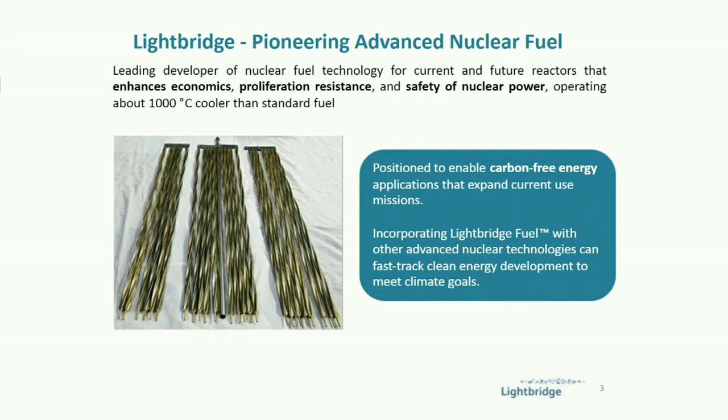The current fuel has these pellets of uranium stacked up inside a tube. Our fuel are metallic rods, one solid piece of metal, with several zones within the metal with different materials produced in a very advanced way. And this fuel runs 1,000 degrees Celsius, over 1,600 degrees Fahrenheit, cooler in the reactor than the current fuels, which is one of the reasons it brings such tremendous safety advantages to the reactor, producing massive amounts of carbon-free energy.

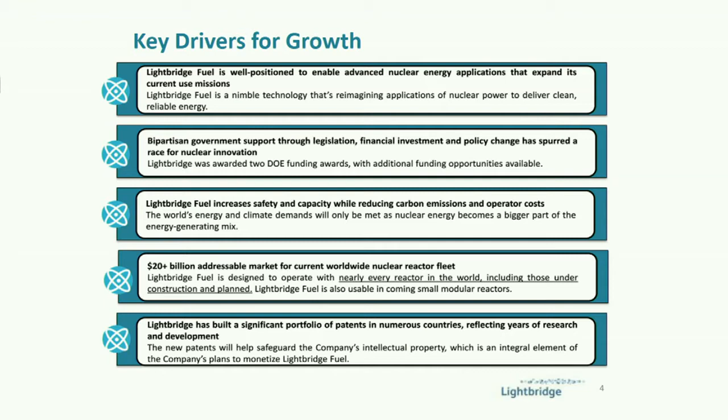If you follow nuclear, you might have heard the term HALEU, or high assay low enriched uranium. This fuel will bring HALEU and its benefits to the current reactors, allowing them to produce more power than they currently do and run longer before it needs to be refueled, resulting in fewer days the reactor is shut down for refueling, and bring very significant safety and economic upgrades to the reactor and a quicker ramp rate, meaning power down and power up very fast.

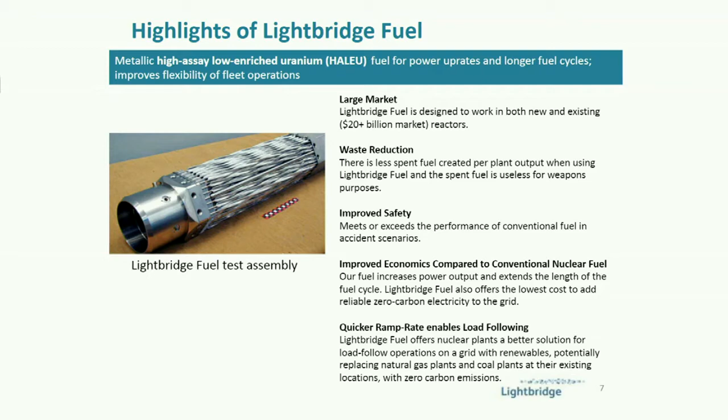For the first time, really having a fuel technology that would allow nuclear to load follow with renewables, just surge down or up in power as the renewables come on or off, as the sun shines, the wind blows, etc.

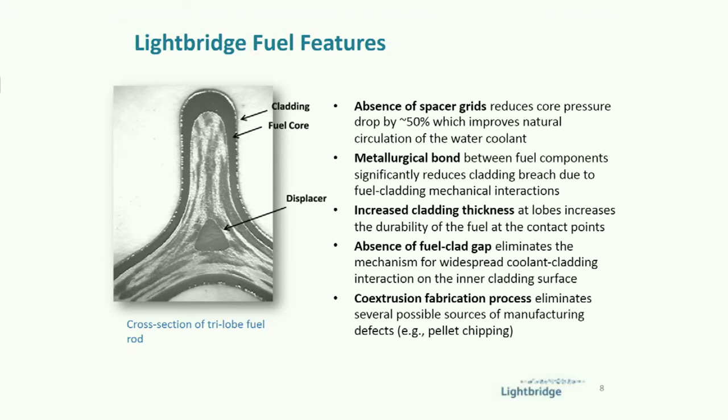On this slide that's coming up here, you can see a cross-section of one of our fuel rods that's actually been produced and tested, showing some of the zones within this rod. And Lightbridge has invented and patented both the design of the nuclear fuel itself and the manufacturing methods of the fuel. And we have several updates in those areas that I'll mention.

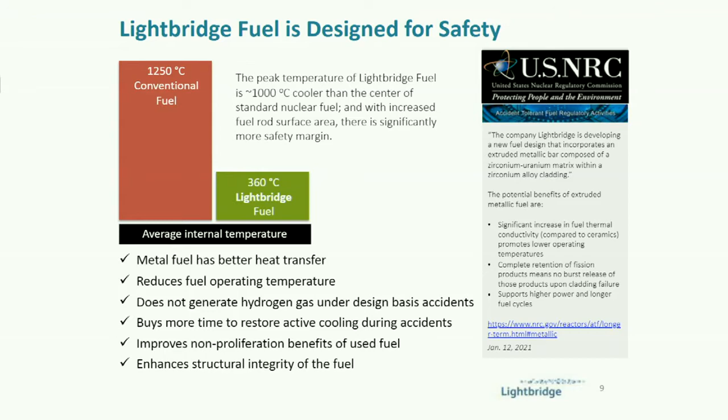You can see in the second bullet on the right side here, the quote from the U.S. Nuclear Regulatory Commission, it says, "Complete retention of fission products means no burst release of those products upon cladding failure." The cladding is the fuel rod that holds the pellets with current fuel, and basically the NRC is saying that this wouldn't happen with Lightbridge fuel. This is one of the benefits that Lightbridge brings.

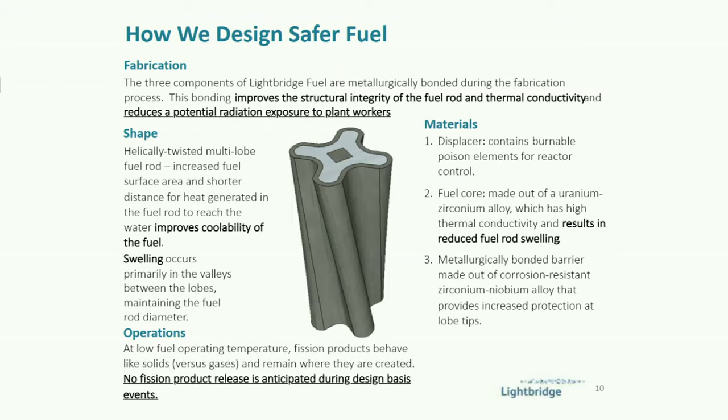So here you can see a schematic of what the fuel rod looks like with some of the benefits, and these are all metallurgically bonded together, which creates a very robust and strong structure within the rod, but also, more importantly, very good thermal conductivity, heat transfer all across and up and down the rod in ways the current fuel just can't do, bringing many of the benefits, including that there's no gas buildup, there's no space for gas to build up in this rod and escape, like what happened in those rods in China in the last few weeks.

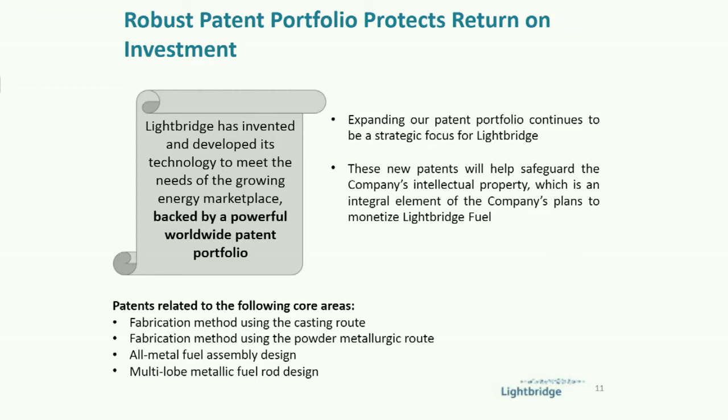So we talked a bit about our patent portfolio, and this is a very important point to Lightbridge, because these patents prevent competition. These patents give us a legal monopoly in both the production methods and the design of our fuel, and it's this intellectual property that in the end is the most important asset of our company.

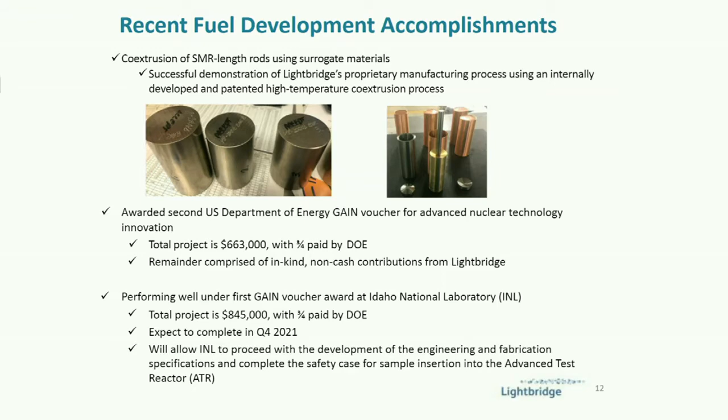We've also very recently been awarded our second GAIN voucher funding grant by the Department of Energy from the U.S. government. GAIN is the Gateway for Advanced Innovation in Nuclear, a program at DOE, the Department of Energy, that is now funding work we're doing at Pacific Northwest National Laboratory in Washington State, demonstrating key aspects of our manufacturing process. And this overlaps with our first GAIN voucher we're also still operating under at Idaho National Laboratory, designing an experiment where we will produce these nuclear fuel samples with high assay low enriched uranium in them, and then put them into the advanced test reactor for testing at Idaho National Lab.

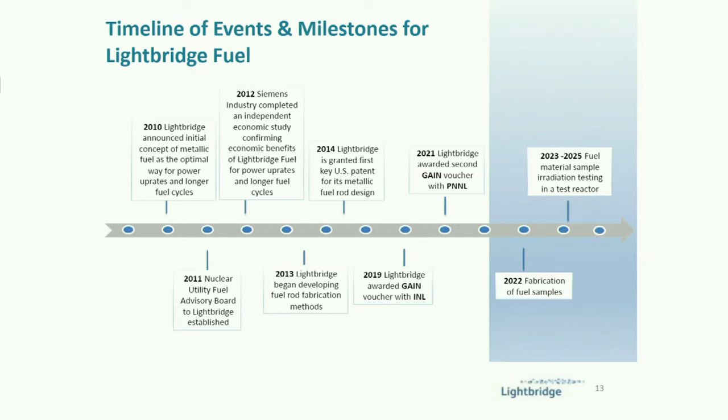We announced the concept of this advanced nuclear fuel in 2010 and have been moving along ever since, advancing this at a very good pace, leading up to what you'll see on the right side of the slide is next year fabrication, manufacturing these fuel samples with the high assay low enriched uranium in them and getting them in the reactor in early '23. So this is at quite an advanced stage.

And just to touch on some of the opportunities for Lightbridge, so we've been designing the fuel for the large existing reactors around the world, over 400 of them. But we also see these large numbers of small modular reactors coming that are in design and licensing phases now that could benefit from the Lightbridge fuel. So as the slide says, Lightbridge is going where the industry is heading.

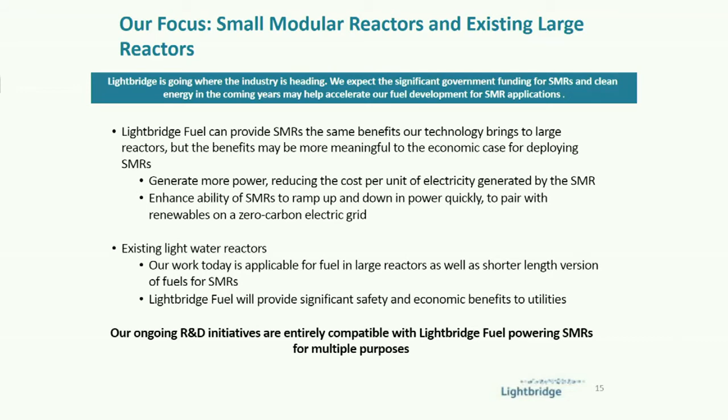And this fuel will allow the small modular reactors to generate more power, which will lower the cost per unit of electricity produced by the reactors and lower electric bills, allow the small modular reactors to pair on grids with renewables, ramping up and down in power as the renewables come on and off in power, replacing fossil fuel plants, including coal plants and natural gas plants, with these small modular reactors with Lightbridge fuel in them. So we think this will be a coming very large market for Lightbridge that really wasn't in the works when we first started designing the fuel, but brings a much larger market to us.

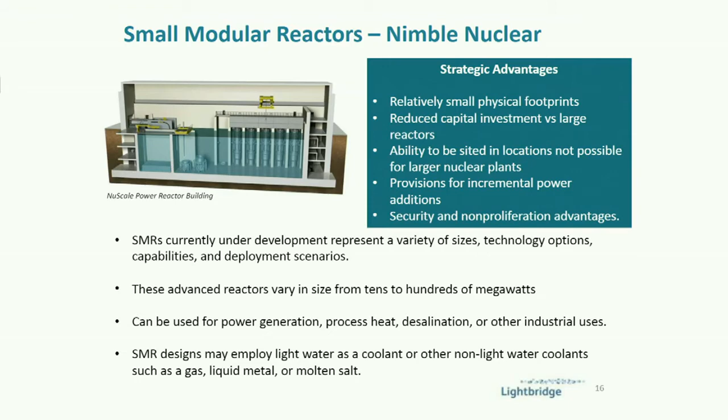The small modular reactors can be built in some places that the big reactors just can't be built. The site doesn't have the cooling water, or the town doesn't need that much energy. There are so many reasons why these small modular reactors can fit in many places that nuclear previously would not have been coming to, and brings new markets to Lightbridge.

These reactors, in addition to adding to our market, they'll really help the economics of where the reactors come to and help save jobs and help these communities, help these areas, bring in good, high-paying jobs and transferable jobs from coal plants. And a logical site for them will be sites that currently have coal plants.

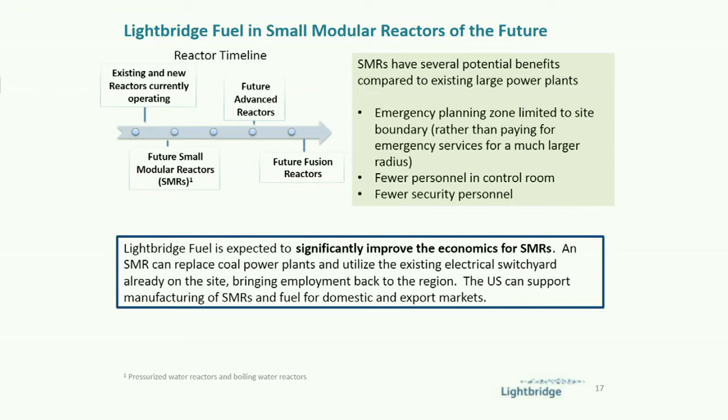Those sites will have some cooling water nearby. They have an electrical switchyard, a connection to the electric grid. They have the transmission lines already in place. And for some of these small modular reactors, they might even be able to use the equipment in the coal plant, like the turbine, and just repower it from the new reactor.

In addition to allowing the small modular reactors to ramp up and down in power very quickly, pairing with renewables on the grid, we could also bring new missions to nuclear. So one of the missions described on the bottom of this slide is the energy from the reactor can be

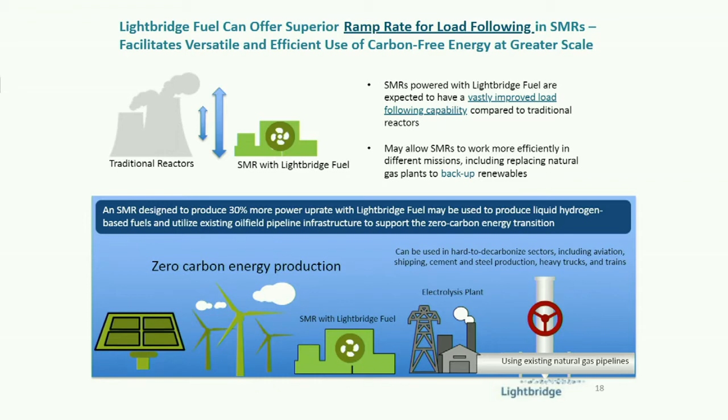used to power electrolysis to separate hydrogen from oxygen from water, producing pure hydrogen, which can be used as the basis for zero-carbon liquid fuels that can power hard-to-decarbonize areas like aviation fuel and shipping, and also for fuel cells, for heavy trucks, for trains, for steel production, for cement production. And this can really help with decarbonizing many sectors across the economy to meet carbon goals here and around the world.

And here are some numbers for a large reactor, just how much money Lightbridge can save the reactor, from increasing the electricity production, from shortening the amount of time that the refueling needs by the reactor fuel lasting longer in the reactors, and by not having to pay for as many outages to refuel the reactors.

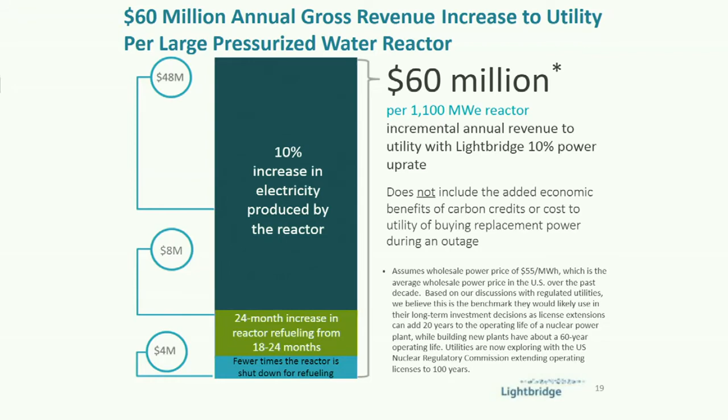And these numbers don't even include added economic benefits from carbon credits that are coming some places in the world, or for some utilities that need to buy replacement power when their reactors are shut down to refuel. So these Lightbridge fuels and reactors will bring many, many benefits to the utilities that own and operate the reactors.

Politically, Washington, D.C. is where our company is. We're in Reston, Virginia, just outside D.C., and working closely with the government. And we're leveraging bipartisan support for advanced nuclear. And this is an area where you're seeing growing budgets, one of the few areas with really strong Democratic and Republican support, very clean handoff from the Trump administration to the Biden administration with continuing programs.

So this first GAIN voucher was granted during the Trump administration, where we're working with Idaho National Laboratory under this $845,000 project, where 3/4 of it is paid in cash by the Department of Energy. The other quarter is provided in kind by Lightbridge engineers working on the project. And this is where we're designing the fuel for the experiment for irradiating it in the Advanced Test Reactor in Idaho, the world's largest test reactor.

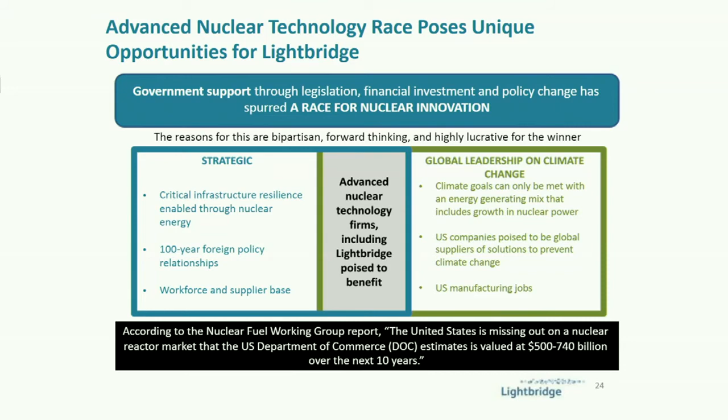strategic needs around the world, including bringing clean, carbon-free energy, having those jobs in America, having that revenue come to America. But also, there are a lot of strategic benefits to deploying nuclear power. You have a say in many, many important issues relating to non-proliferation and other key issues in the countries deploying nuclear reactors, and it's important to the U.S. government that U.S. companies win these contracts.

And I think that's part of the reason we're seeing support for Lightbridge fuel, that there's a growing belief in government that our technology can help do that. That's certainly what we believe.

Getting toward the end of the presentation here, a strong financial position by the company, a lot more than a year of cash on the balance sheet. We recently were added to the Russell MicroCap Index, which is bringing a little more interest into the stock.